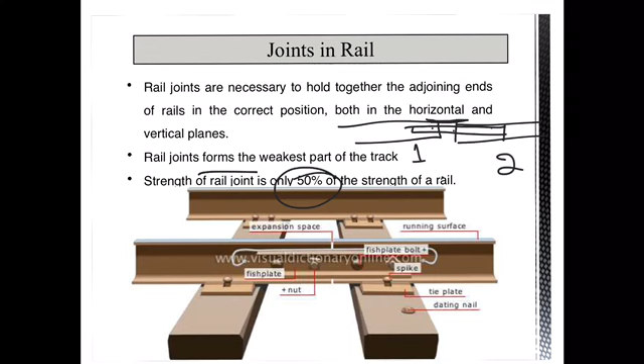And always the joints are the weakest part in the railway track, and it has been seen that the strength at this particular joint portion is only 50% of the strength of the parent rail section. Now we'll look into what are the requirements of an ideal joint. An ideal joint must provide the same strength and stiffness as the parent rail. The characteristics of ideal joints are summarized as follows.

The first requirement is holding the rail ends together. As I already mentioned, an ideal joint should hold both the rail ends in their precise location in the horizontal as well as in the vertical plane, so that continuity in the track can be provided. This helps in avoiding wheel jumping or deviations of the wheel from its normal path of movement.

And whatever joints we provide should have the same strength and stiffness as the parent rail. Though it has been seen that the strength is 50% of the parent rail, you should construct your ideal rail joint in such a way that the strength will be similar to the parent rail. And in the joints you provide, a sufficient expansion gap needs to be provided for the free expansion and contraction of the rails, which may be caused due to the change in temperature.

And the joints provided should be flexible for the easy replacement of the rails. And we have seen that rail wear is common under all normal operating conditions. So the joints you have constructed should have an adequate provision for the wear of the rail ends. Next, with respect to elasticity, the joints should have adequate elasticity as well as resistance to longitudinal forces, so as to ensure trouble-free tracks.

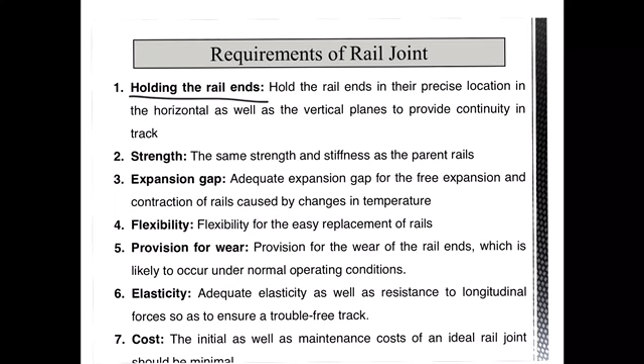And the last requirement is with respect to the cost. The initial as well as the maintenance cost of an ideal joint should be minimal. So these are some of the requirements to be fulfilled by ideal joints.

Next we'll look into the various types of joints that are provided in the rail section. We have three main classifications. The first is the classification according to the position of the sleepers, how the sleepers are placed with respect to the joints. With respect to that, we have four types of joints: supported joints, suspended joints, bridge joints, and base joints.

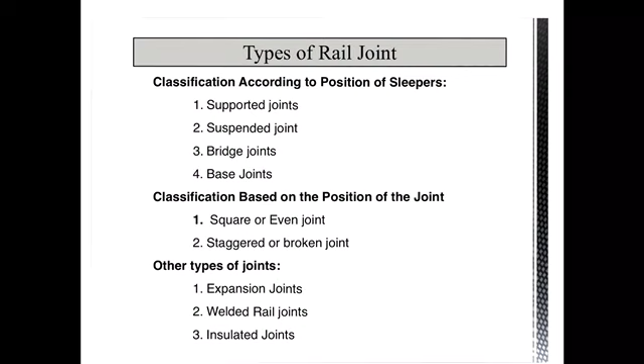The next classification is based upon the position of the joints, the position in which you have provided the joints. With respect to that, there are two types of joints: square or even joints, and staggered or broken joints. And we have some other types of joints intended to serve certain functions, which include expansion joints, welded joints, and insulated joints. We'll study in detail the functions of providing the various joints further.

So now let us look into the classification of joints based upon the position of the sleeper. So here you need to observe where the sleeper is provided. In this, the first type of joint is the supported joint. As the name indicates, look into the picture here. The rail joints are supported directly over the sleeper. So joints will come exactly at the place where you have the sleeper.

So why has this been provided like this? It was expected that with the help of the supported joints, the wear and tear of the rails can be reduced since there is no cantilever action. We'll look into what that cantilever action is in the next type of joint. Since there will not be any cantilever action in the supported joints, it is expected that the wear and tear of the rail can be minimized.

But in actual practice, though the wear and tear can be minimized, when the joints are provided directly over the sleepers, it tends to slightly increase the height of the rail end. As such, the run on the supported joint is normally hard, wear and tear of the sleeper is also expected since the joints are provided directly over it, and maintenance presents quite a problem in the supported joints.

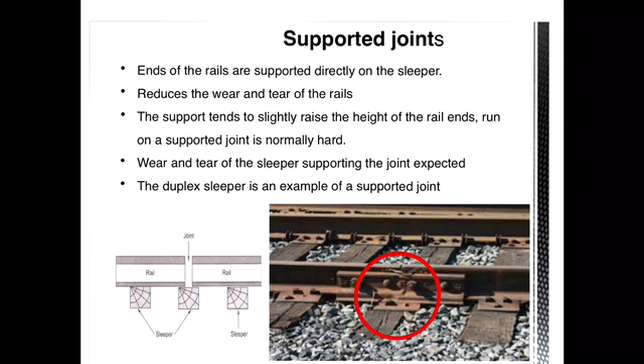The next type of joint is the suspended joint. Here in the picture, these are all the places where we have the sleepers. This is the particular place where the joint has been provided to connect the two different lines. As you can see, the joint is slightly suspended beyond the railway sleeper. I mean to say that the ends of the rails are suspended between the two sleepers, and some portion of the rail section is cantilevered at the joint.

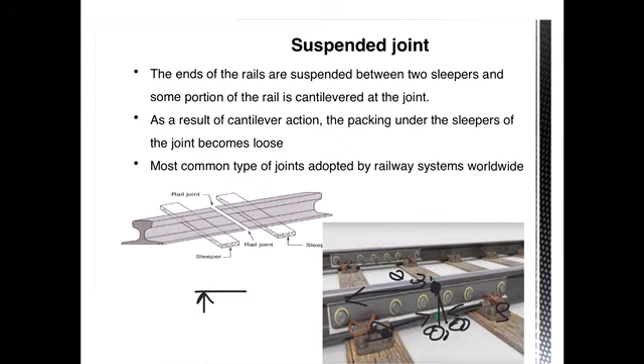So what is the meaning of cantilever? If any portion is taken beyond the support, we call it a cantilever. This particular rail section is cantilevered beyond the support, and the support is nothing but the sleeper. As a result of the cantilever action, the ballast packing under the supports tends to get loosened due to the hammering action of the moving train load. This type of joint is most commonly adopted in railways worldwide, and it has also been popularly used in our Indian railway system.

The next type is the bridge joint. The disadvantages we had in the suspended joints have been overcome here with the help of the bridge joint. So what was the disadvantage there? The ballast packing below the joint tends to get loosened because of the hammering action of the moving load, so that needs to be reduced. So how can that be overcome?

This bridge joint is similar to the suspended joint. We will have the joints suspended beyond the sleeper, but the two sleepers on either side of a bridge joint are connected by means of a metal flat or corrugated plate, known as the bridge plate. You can see here in the picture the bridge plate used to connect the two sleepers. It can be flat or curved in shape.

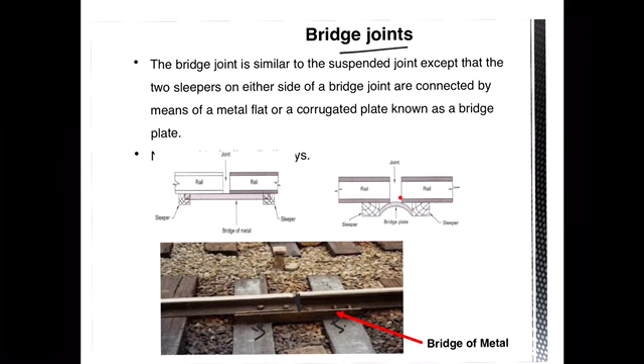The last type of joint is the base joint. The base joint is similar to the bridge joint, with the only difference that the inner fish plates are of the bar type and the outer fish plate is a special angular type, in which the horizontal legs are projected further to extend over the sleeper to be bolted on the bridge plate and the sleeper. You can see here this portion is projected beyond, so that you can provide the connection between the bridge plate and the sleepers.

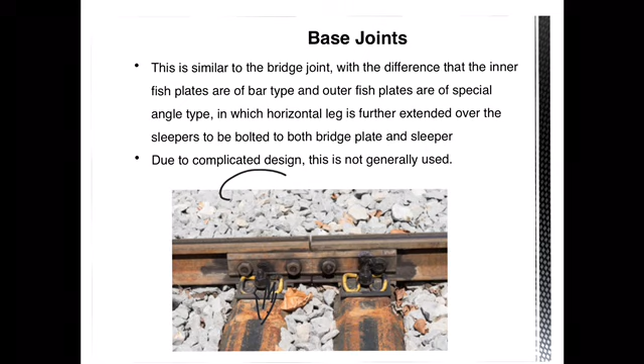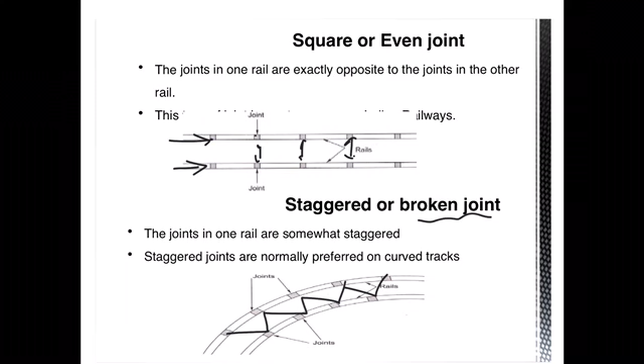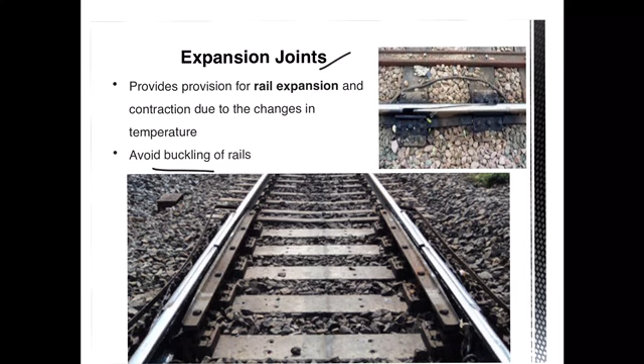The other types of joints are provided to serve some functions. The first one is the expansion joint. So why are expansion joints provided? These joints provide a provision for expansion and contraction, which occur because of the change in temperature. Also, by providing the expansion gaps, you can avoid defects in the rail, that is, buckling of the rails can be avoided.

The next type of joint is the welded joint. We already know why welded joints are provided. If you want to increase the length without any fish plates and fish bolts, you can go for welding the joint section. These welded joints fulfill almost all the ideal requirements of a joint, and you can call this a perfect joint. Steel rails are welded so as to reduce the noise in the running train.

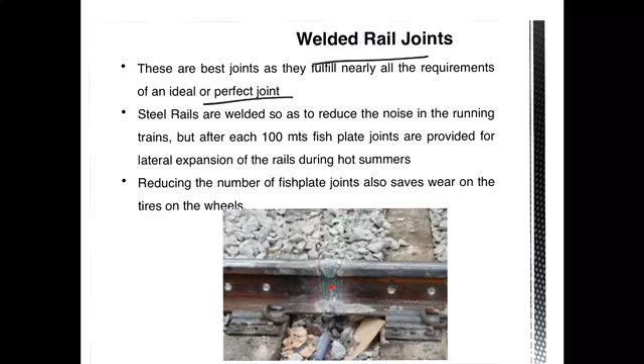But after 100 meters of welded rail, one fish plate joint needs to be provided, to give a sufficient expansion gap for the change in temperature. Also, by reducing the number of fish plate joints, we can reduce the wear on the tires of the wheels. In the picture here we can see how the joints have been welded to connect two different rail sections. And the last type of joint is the insulated joint.

First we'll understand why insulation is required in the track portion. Some track portions need to be monitored with a track circuit. What is this track circuit? Sometimes at the railway station, you need to identify whether the train is stationed on the track or not. You cannot come and see all the time. So we provide a track circuit, and with its help you can identify the presence of a train on the tracks.

When such track circuits are provided, there are chances that the current will run beyond this railway track, and that may cause certain danger. To avoid the current running beyond the track portion, we need to insulate the joints. Insulators are provided at the joint portion, and such joints are called insulated joints. So what is the purpose? An insulating medium is inserted in the rail joint to stop the flow of current beyond the track-circuited portion.

Insulated joints are required especially at each track end part and also in the crossing section. Usually dense polythene material bonded to a rail joint can provide superior insulation between the rail track and the rail joints. So these are some of the joints that need to be provided to connect two different rail sections. With this, I'll conclude this session.